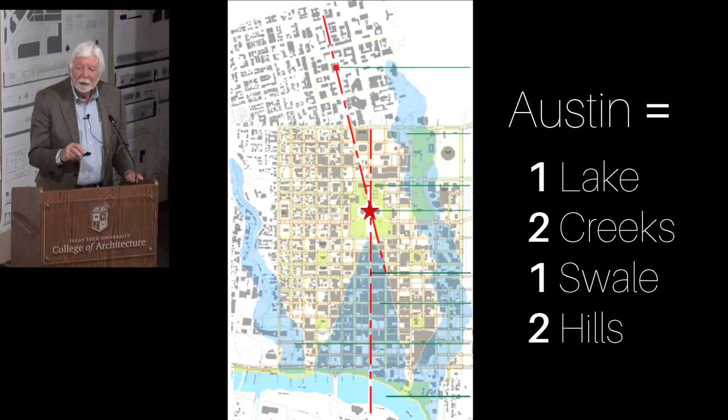Picking up where Charles Waldheim left off yesterday, the DNA of Austin. A lot of you probably know something about Austin. I know a lot about it. I went there to school in 1958 and only left once. The DNA: you start with a lake, 2 creeks, 1 swale, which is Congress Avenue, and 2 hills. One's the Capitol and one is the University Tower. That's Austin. Thank you very much.

And then it maps out like this. The campus, where there are about 80,000 people a given day. The Capitol complex, where there are about 30 thousand and will be more. And downtown, where there's about 80 to 100 thousand, maybe more, and a lot of people live there now.

This is Austin in 1997. This is Austin in 2012. That was 4 years ago. At any given time, there's about 10 cranes going in Austin, sometimes more than that. So it's a rapidly growing city. I read the other day, for many years I've been reading that it's the fastest growing city in the country, but I don't know whether that's okay or not, but it is.

The geography of opportunity, I'm real interested in this aspect of Austin. That diagram there is a diagram of the corridors, some of the corridors, and some of what we call black holes: university land, state land, military, TxDOT land that just sold last year for a major mixed-use development next to this freeway, a large state area north of campus. This is about 70, 80 acres, maybe more than that.

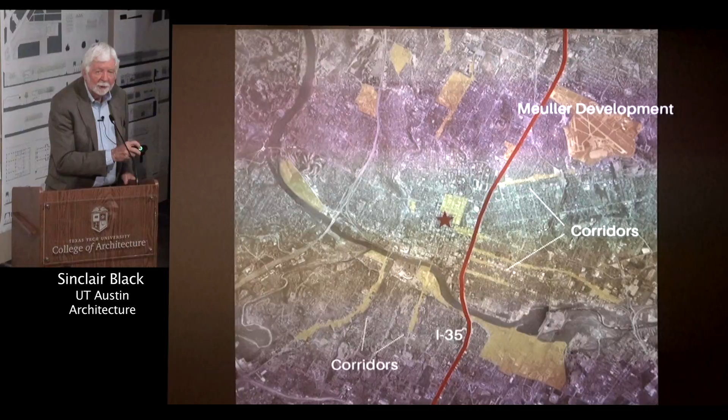This is I-35 corridor, that red mark through the city. That is, you'll see at the end, we're really working hard to get rid of it. That's the state. When I say the word black hole of all, that's what I'm talking about, is those terrible buildings, 13.5 acres of parking, of land area. There's really more parking than that, and it's only about 70% occupied by state officials, state people.

So for years we've been doing projects like this with students. This is a student project where this whole southwest quadrant here has been the subject of great interest for a long time. This was done before about $1 billion worth of development, all of which is nearing completion. The library at the corner of downtown, Seaholm power plant, which is back over there, the green water treatment plant. We'll get to see part of those.

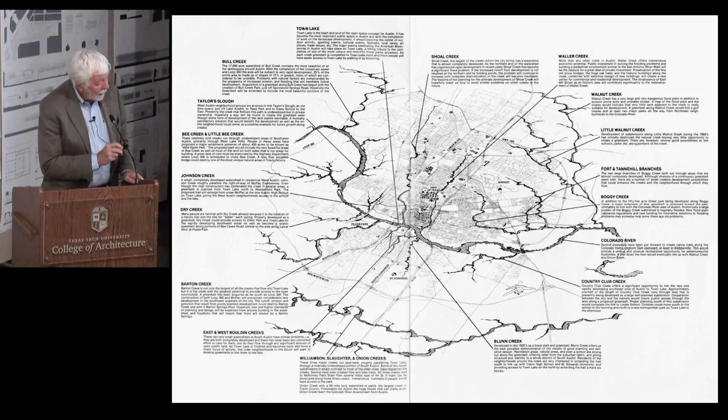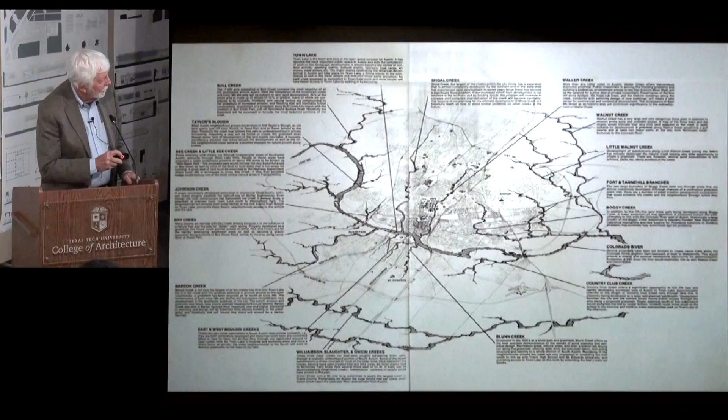It's kind of been called the foundation document for the parks and linear spaces of Austin. Waller Creek is being redeveloped now from the lake up close to the university. Shoal Creek is pretty much a trail most of its way already. Zilker Park is there, and that South Austin neighborhood has a beautiful little creek.

240 miles of creek edge, and that's a 5-minute walking distance from that. These maps were done in about '74 or '75, and it became the bicentennial gift to the nation. After that, there was about $20 million spent over the years on various parks and trails on some of these creeks.

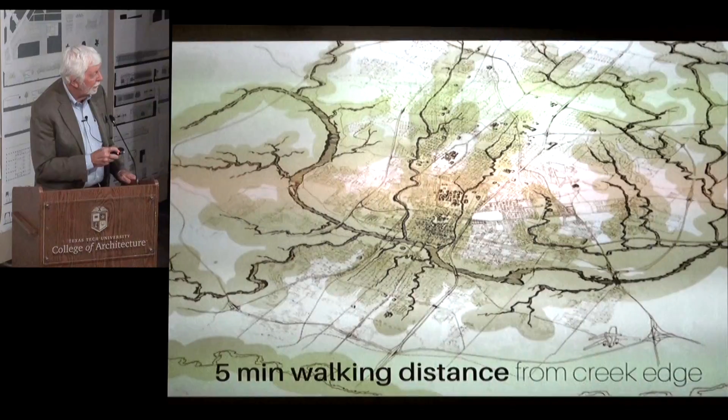So Plaza Saltillo was a competition among developers. We worked for Ken Hughes, who developed Mockingbird Station. Unfortunately, Ken passed away later, and we didn't get the project. But you can see it's 11 acres right next to downtown.

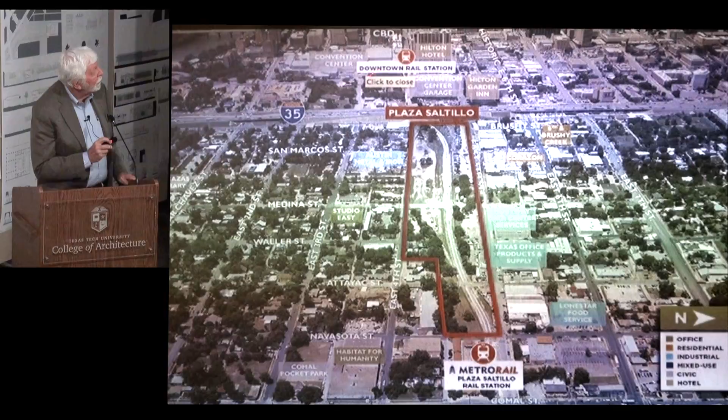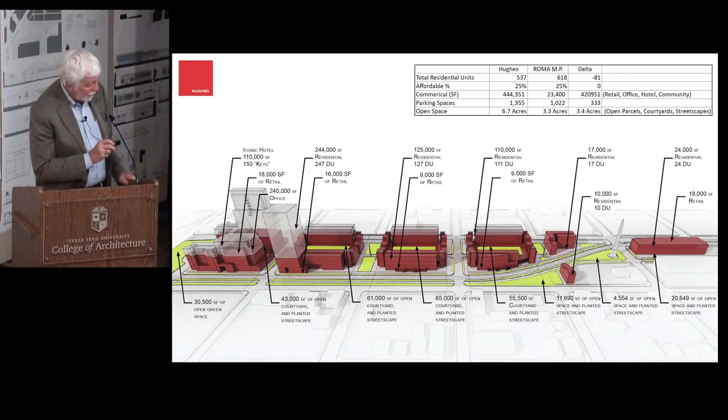That's just a diagram of it and a tally of mixed-use buildings, and that's a little pictorial diagram. Next to downtown, we proposed a major hotel, office building, and point condo, and then those other buildings behind, and the existing rail goes there now.

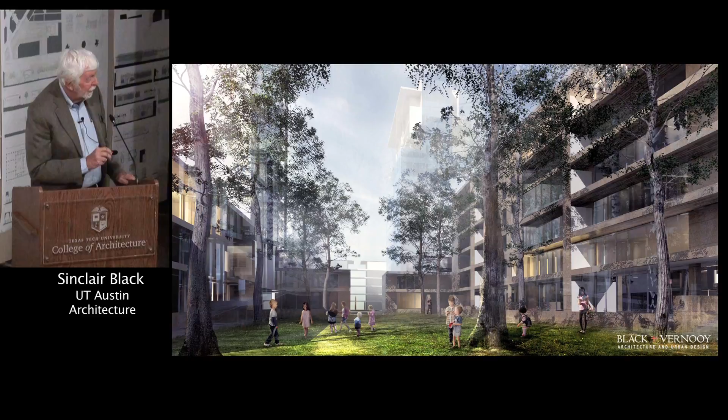So we developed this building type. What you're looking at there, you're on about the second or third floor, a private, semi-private courtyard for the residents. Retail on the street edge, parking in between, sandwiched in there. It varied from one level of parking to three, depending on the density allowed, which was a function of how close to downtown it was.

Green Water Treatment Plant was about a 7-acre area that was defined by—

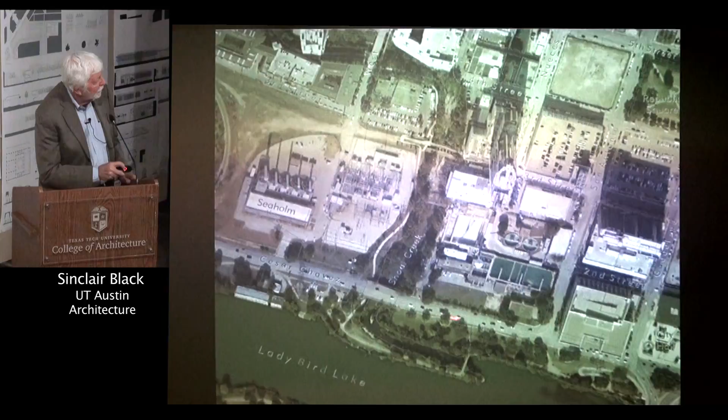That's the Green Water Treatment Plant there, which is now almost built out, not quite. That's what it looked like at the time of that competition. That was just an early diagram of what could happen there. Some very rough sketches of what that 2nd Street could wind up as at the creek, with trails on the creek.

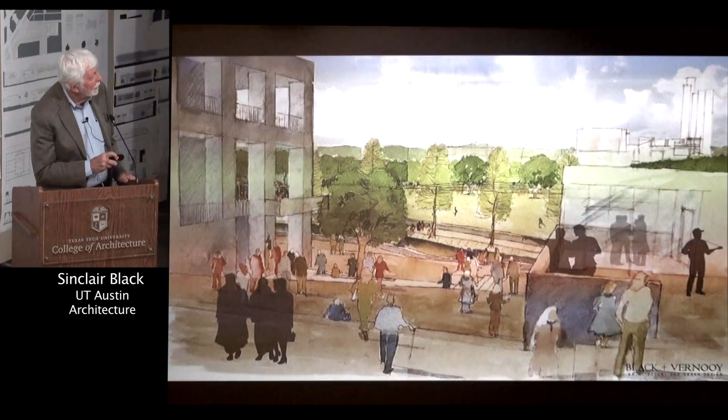And then that is the site for our new public library by Lady Bird Lake, which is almost finished. That's the Seaholm power plant in the background, which was abandoned in the '70s.

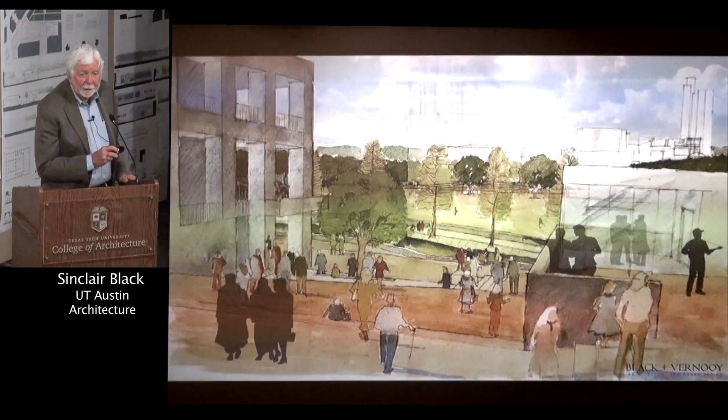That was, you see it here, and that's a segue to Seaholm, located at the corner of downtown, basically on Shoal Creek and on Town Lake. This is the intake structure. Water was shipped up here to cool the generators and then dumped back in here. This peninsula is man-made so that the hot water went that way and the cool water came this way.

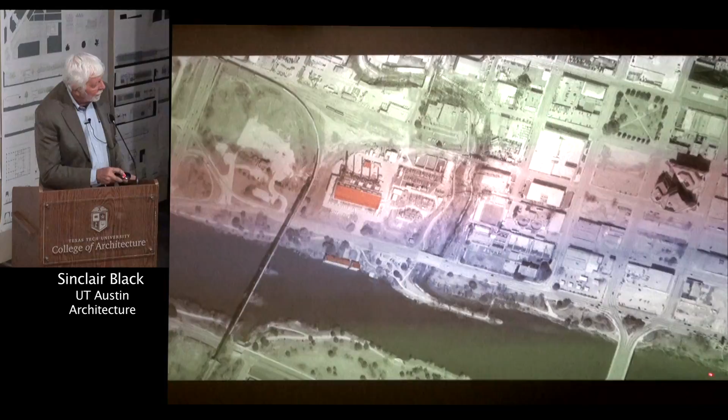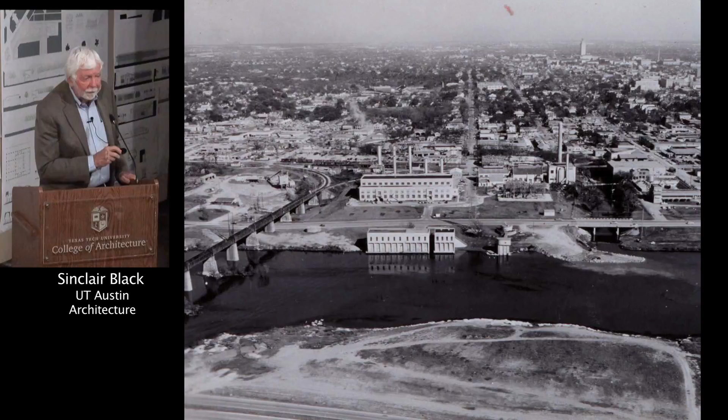That was it at about 1958 or '60 or something like that. It was the last power plant in the U.S. built as a building.

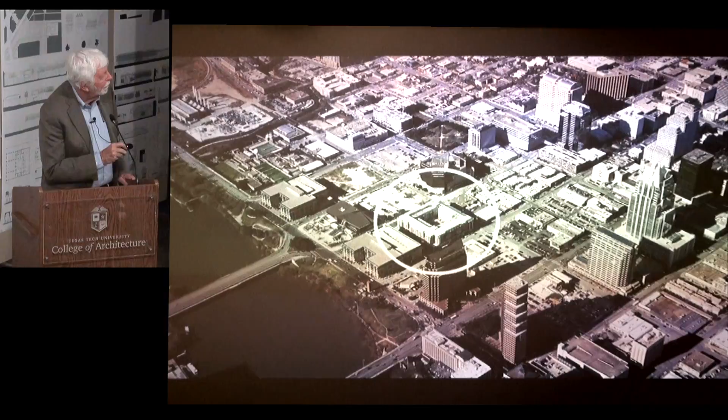We designed this—we were the design architects. Page was the architect of record. And that was a real early sketch that I did, oh gosh, now 15 years ago or more.

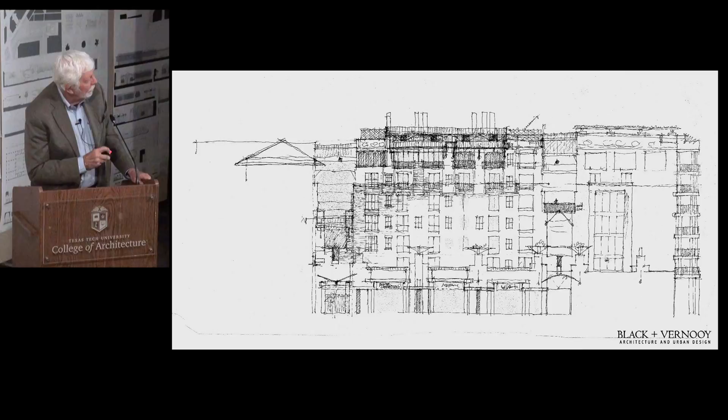And then, that's what it turned out like. It's 230 units on 1.74 acres, or 130 units per acre, which is quite dense—it's almost the limit. Push it beyond that, it's pretty difficult.

That's the east facade, which I think is my favorite. It's a very simple building based on early 20th century buildings in New York and Chicago, where all you have to do is follow the code, provide access and egress. 60% of the units face out, 40% face in, and you've got—whoa, what happened there?

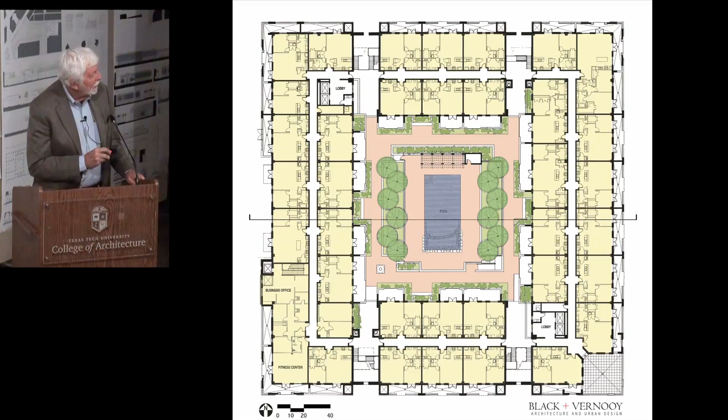You've got a 160-foot square courtyard in the middle. 16 full-grown trees are in there now.

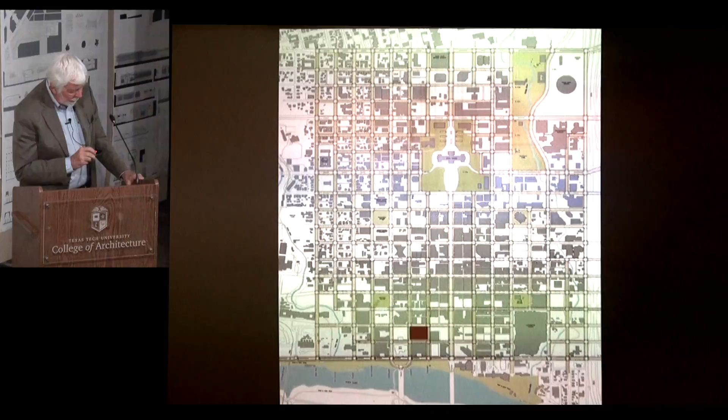And the south edge of it became part of the Great Streets program. Great Streets master plan we did, there's that site, and all the way across here to Seaholm. All of these things are packed together.

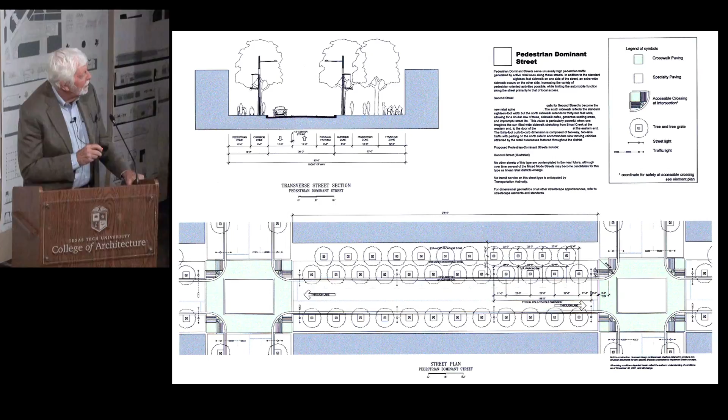This is a typical, we did 9 prototype streets. This was a unique prototype. In other words, it wasn't a prototype, it was a unique street. It's 2nd Street, and it's unique because it's the retail

street now for Austin. We searched everywhere to find a photograph of 2nd Street. For a long time, we couldn't find one. And then I found one in my own slide collection. Apparently, I'm the only person ever who was dumb enough to photograph such an ugly street.

Now, coming down toward micro, from macro, how's my time?

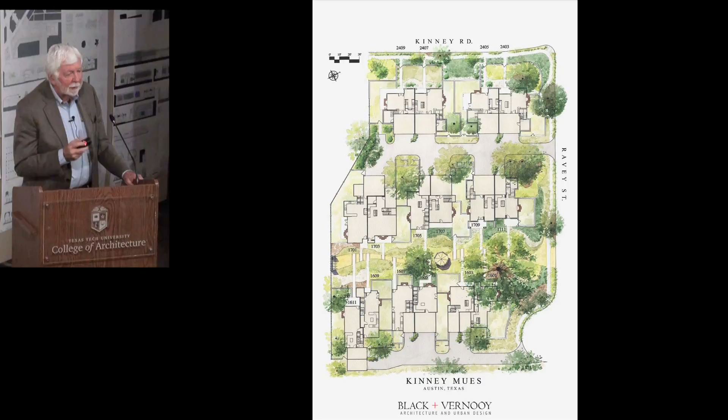This is an infill project. It was a single-family house on an acre plus a little. So we got 8 buildings, 16 units, in 8 duplexes, and no garages facing out to streets, which is sort of a pathological commitment on my part, not to have garages face the street.

This was a fun little project called Tiny Victories. That's the name of the competition held by the local AIA. Tiny Victories had a program like this: 200 square feet, no plumbing, no kitchen, electrical, maybe a fan, well ventilated, well protected, 200 square feet. Ours was 11 by 18.

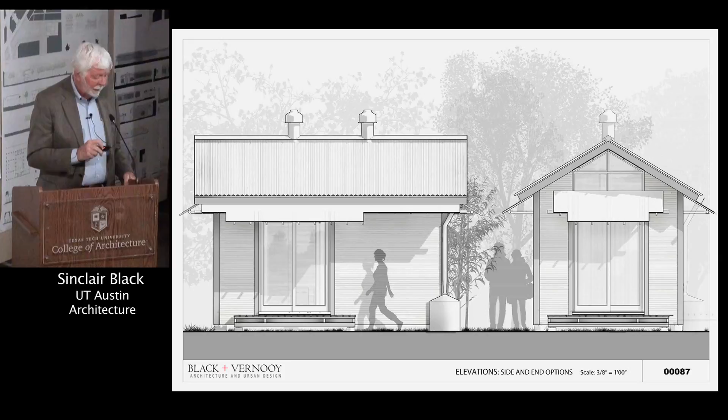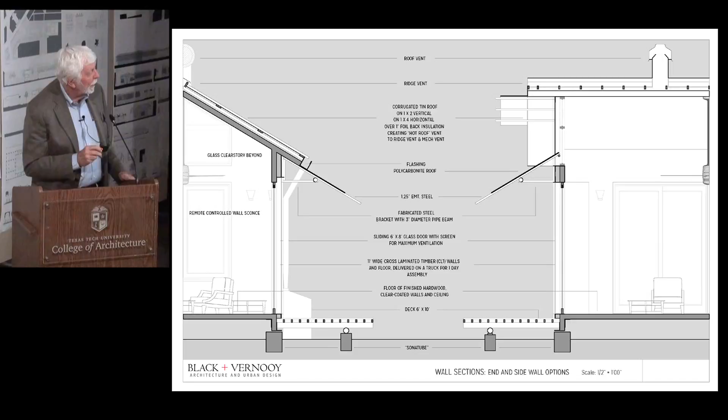So in that competition, they had a bunch of entries and they chose 4, and they're building out a lot of them. Will eventually be a community of 140 living units for the chronically homeless. These are people who probably will never go back inside of a real house. And of course, everybody donated their time. McCoy's Lumber donated some of the material, sold the rest at cost. And that was our competition entry.

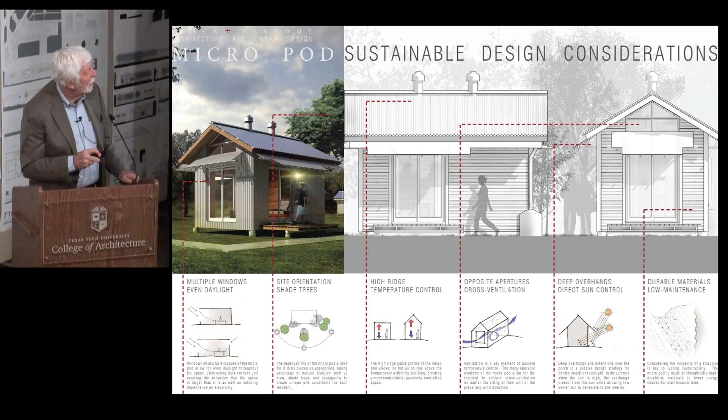That was our energy considerations outlined. And that was the first one built. 2 more are scheduled to be built, and maybe more after that. But I could live there. I may someday.

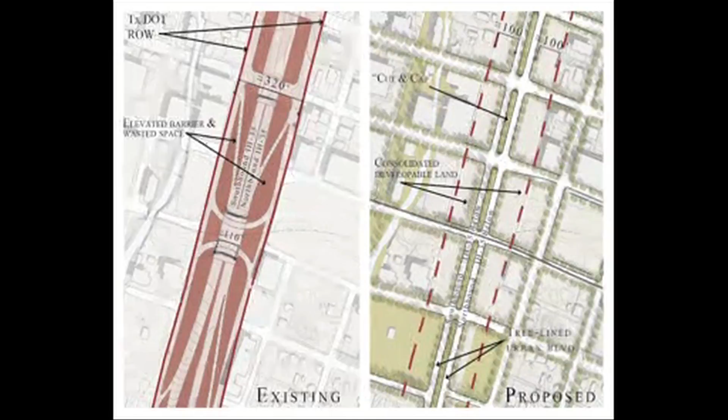What if we could reclaim the I-35 corridor through downtown Austin, reconnecting the street grid and restoring East Avenue in the process? Imagine the main lanes of the interstate below ground, covered at ground level with a continuous cap, replacing the former frontage roads with a civilized urban boulevard appropriate for all users, creating more driving options for city traffic, plus opening the way for new parkland and high-quality development.

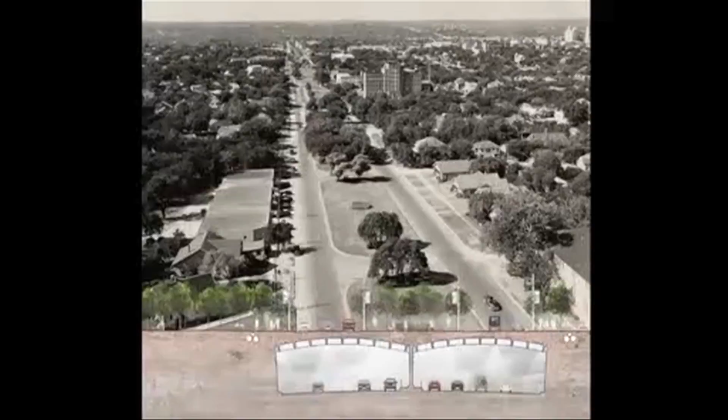Our purpose is to reconnect Austin back to the future. This plan improves regional mobility by increasing capacity with more lanes, reduces congestion by relocating local traffic, and adds 60% more east-west connections, increasing accessibility into downtown.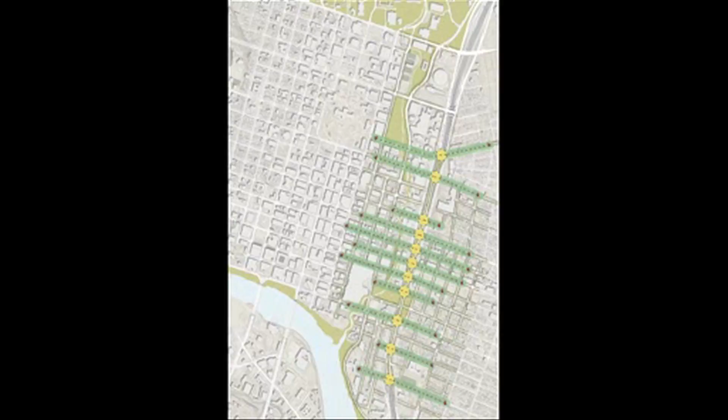We can reconnect our city with great streets, separating high-speed freeway traffic from our city traffic. We can create a pedestrian, bicycle, and transit-friendly environment, provide a higher quality of life, and facilitate the social and economic exchange that cities are founded upon.

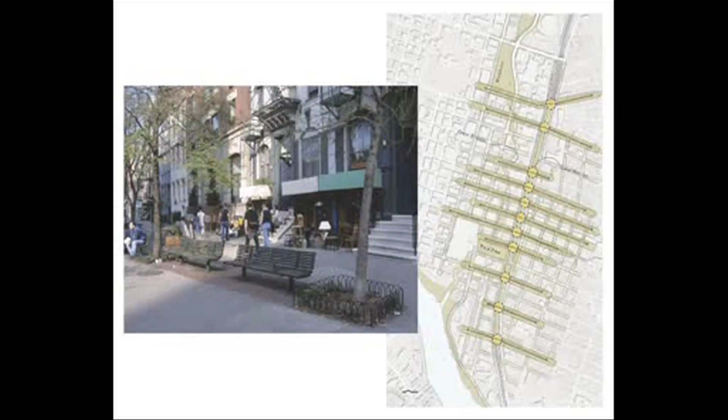2nd Street, pictured here, is the best success story to date of Austin's Great Streets program, a truly radical transformation and huge benefit, both economically and socially.

Looking east on 5th Street from downtown, the barrier of the highway is obvious. But consider this: with the highway hidden below ground, this intersection is once again a viable part of our city. Voila! Human-scale development in an urban environment.

Let's see it again. Remove the barrier. Connect the grid. Re-engage with your city. A place for people, sidewalks with shade, a vibrant community.

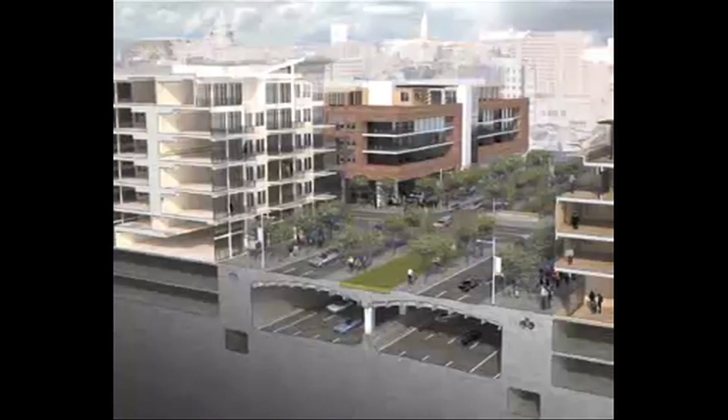We can solve our traffic problems and address the negative impacts of I-35 with a technology called cut and cap. The freeway main lanes are in the cut, which is covered with a cap that blocks freeway noise, and a ventilation system removes vehicle pollutants from the air, making I-35 a better neighbor for everyone.

Like Austin, cities across the country are struggling with aging, congested highways that divide their cities. In Dallas, there is a new cap over the Woodall Rodgers Freeway. Clyde Warren Park opened in October of 2012. It is already a huge success.

Boston reconnected downtown to its own waterfront, as well as the historic North End neighborhood, improving traffic flow, saving commuter time, and creating new parkland. Other cities have capped over rail lines and parking to create usable urban space.

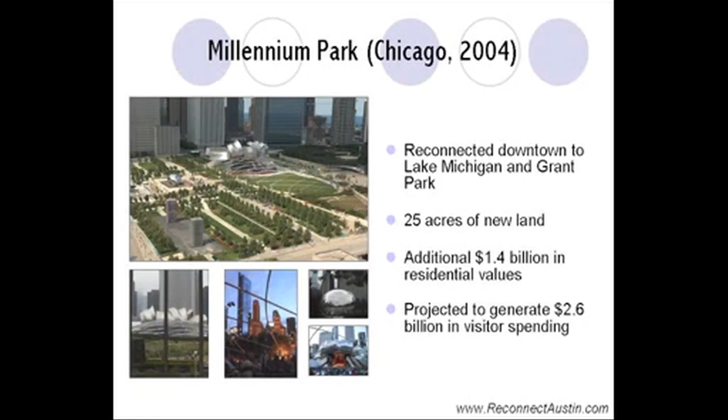New York's subway system is a cut and cap, even along Park Avenue. Millennium Park in downtown Chicago is a cap over rail lines. And Houston's Discovery Green is a downtown park over underground parking.

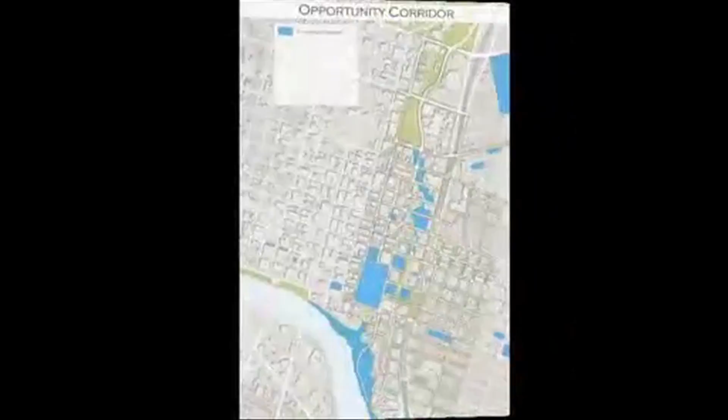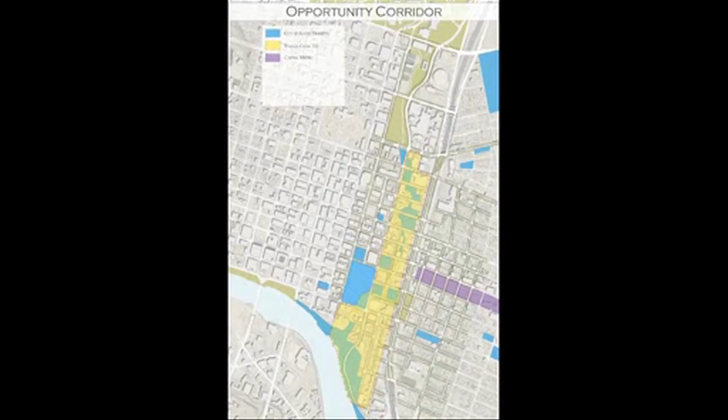Massive taxpayer dollars are already being invested in projects along I-35, including the Waller Creek Tunnel and its associated tax increment financing zone, Plaza Saltillo and the land owned by Capital Metro, the existing and growing Medical and Innovation District, the proposed University of Texas Medical School and Teaching Hospital, and of course the University of Texas campus.

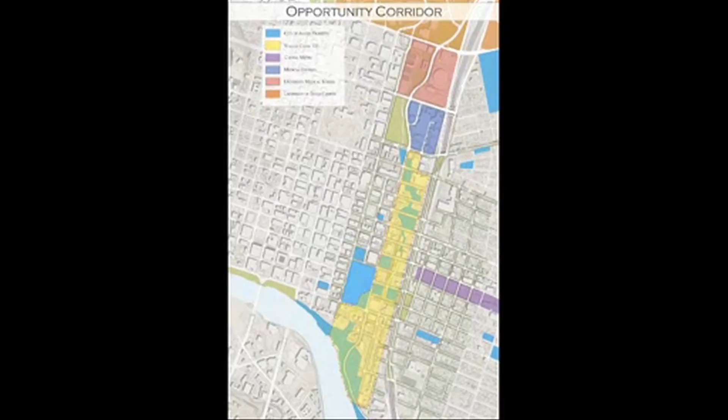Ours is a unique, once-in-a-lifetime opportunity. The time to act on this vision is now. At risk is our quality of life and economic competitiveness as a city.

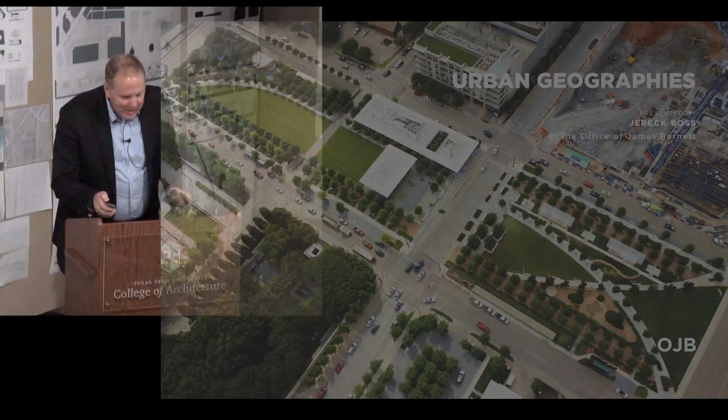A little bit about our office before we get into things. Urban geography. So I am, I guess in the group, I have never been an educator. I have been a projects guy from the time I graduated, and work with the office of James Burnett. Our focus is on built work. We do very little master planning. If we do master planning, it's usually with the goal in mind that we will be building something as soon as we complete that plan.

So today what we would like to present are two different projects. I guess in the context of a city, I would think they're both micro. One is a 5-acre park in Dallas, so maybe that's the micro.

The other is a 180-acre redevelopment in downtown Oklahoma City, where we reconstructed 9 miles of streetscapes on 17 street alignments. So 180 acres, maybe in the context of a sprawling city like Oklahoma City, is micro, but we think it's maybe a macro project.

But a little bit about our firm. We were honored last year as the ASLA Firm of the Year, and very excited to follow that up this year. In just a couple of weeks in New Orleans, Jim Burnett will be receiving the ASLA Design Medal. So very excited about that.

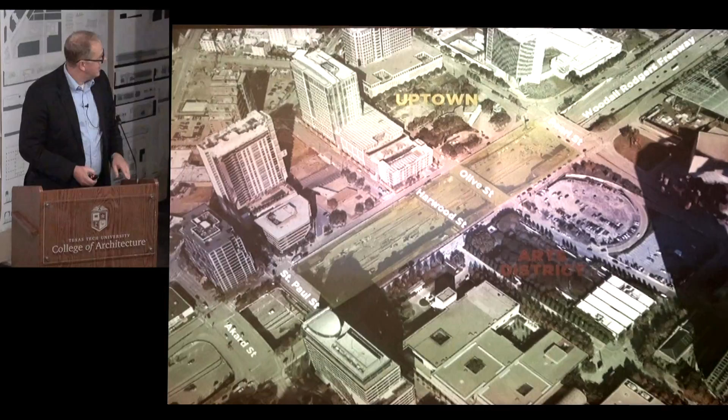This is the location of the park. This is where Museum Tower is, this is the Nasher Sculpture Center, Dallas Museum of Art, and now all of these projects are being filled in with new towers from award-winning architects from around the world.

A little bit about the park. It began as an idea back in 2004. The Park Foundation was formed with John Zogg from Crescent, Jody Grant from Texas Bank, and Linda Owen, who was with the Real Estate Council in Dallas. As they formed that foundation, they put $1 million together to do a study. With that $1 million, we did some preliminary engineering, really came up with a cohesive idea, put some pricing together, and came up with this big, crazy number for this idea to see if it would work.

In 2006, the city raised $20 million, and agreements started moving forward. In 2006 and 2007, there was a worldwide design competition - they went out to 50 firms. We were shortlisted with 4 and won the project, and we were off to the races.

One of the conversations that David and I had in the car this morning - as I was in design school and thinking about my career, I was always most interested in design. The thing I have learned as I have practiced over the years, there are 2 skill sets that have become very important. One is really understanding economics and business, and the other is understanding marketing. So as we work on big projects, we're always trying to expand those projects, think outside of the limit line of work, and really understand how the financial components work.

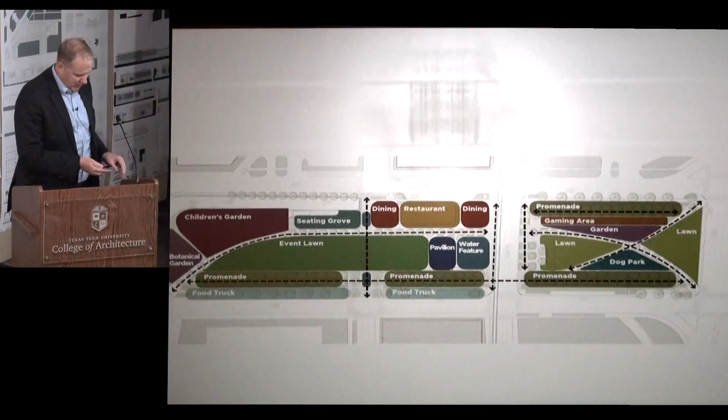So the program: botanical garden, children's garden, a seating grove that acts as a reading room. We have outdoor dining, Savor restaurant, the southwest deck, a big water feature plaza. The pavilion and restaurant were both designed by Tom Phifer, who we had worked with on the Brochstein Pavilion at Rice University. The main event lawn, a big promenade and a lawn, the dog park, and then a gaming area, and then another lawn. Right now, the children's garden will expand to this area, and there's a new water feature and art installation proposed for the other end of the garden.

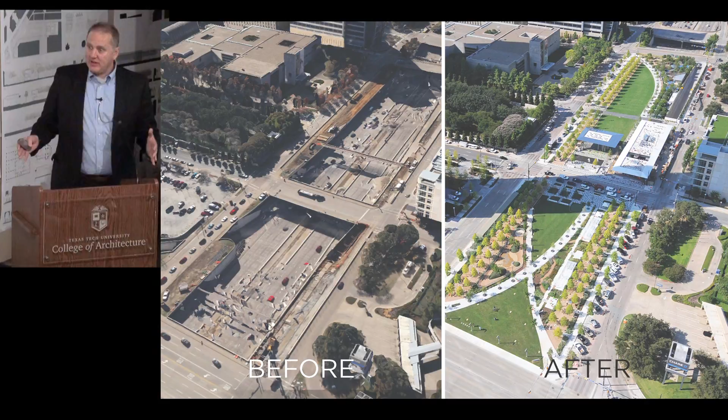This is the park before—an active 8-lane freeway. One of the requirements and challenges of this project was you cannot close the freeway; we have too many vehicles coming through this part of the city. So there was a lot of coordination, a lot of finagling with TxDOT to install at off hours, 10 p.m. to 5 a.m., really working those schedules with various events downtown to install 300 plus box beams.

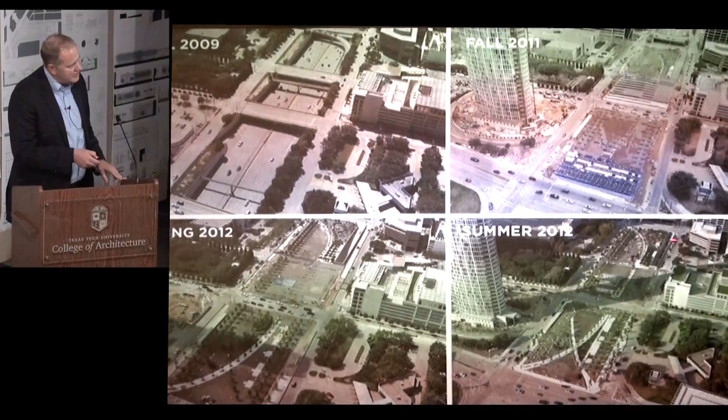In these images, you can start to see this park coming together: the initial condition, some of these box beams working their way across, then beginning to fill up the foam and the soil systems, putting all of this together, beginning the planting, and then finishing up with the hardscape. Pulling this together to have the completed project.

Another thing that changed—these are feeder roads, and if you've ever been on a feeder road in Texas, it's about maybe going faster than freeway speeds, and even coming out of a restaurant on a feeder road or trying to get off, you're taking your life in your own hands. So one of the big ideas was, what if we had parking along the side of the park and on-street parking on this feeder road? TxDOT said, absolutely not.

We worked with the city of Dallas. We said, we've got to think outside the box—who's your boss, who can really help us make this decision, how can we maybe change some of this thinking? So we have on-street parking now on the feeder road. These lanes have narrowed, traffic speeds have really slowed down. As people come from the central business district or the arts district and cross these TxDOT facilities, the traffic is much slower, much easier to work with.

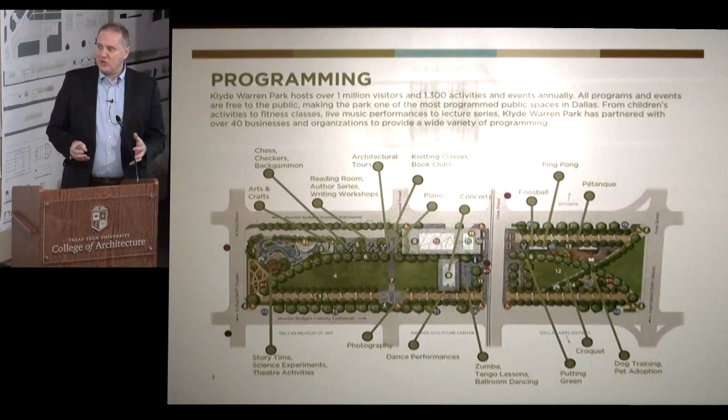And they're always monitoring who's attending, how successful is it, and do we need to be making changes to keep this relevant to what people are really looking for.

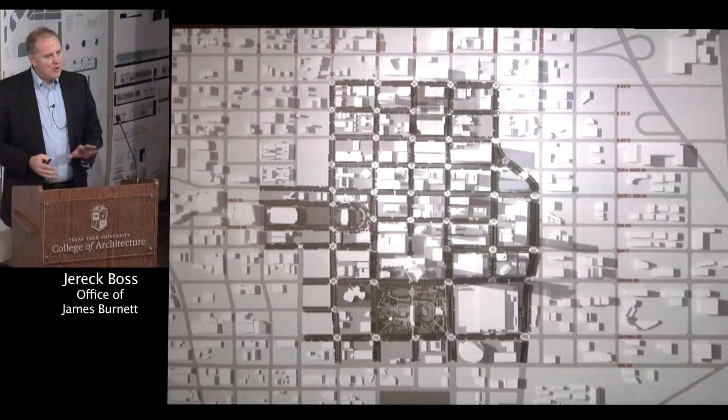So Devon put together a TIF. They had a $750 million, $800 million project that they were working on. They decided to front-end fund the project, so you get all that TIF money for 20 years, you get it on year one, and you can spend it and do all of those things.

They put a list of projects together, and then they encompass this 180 acres, and they say, we want to give this back to the city, and we don't want anyone to think that we've spent the money on ourselves. So Devon's project is exempt from the TIF, so they don't spend any of this money on their own development.

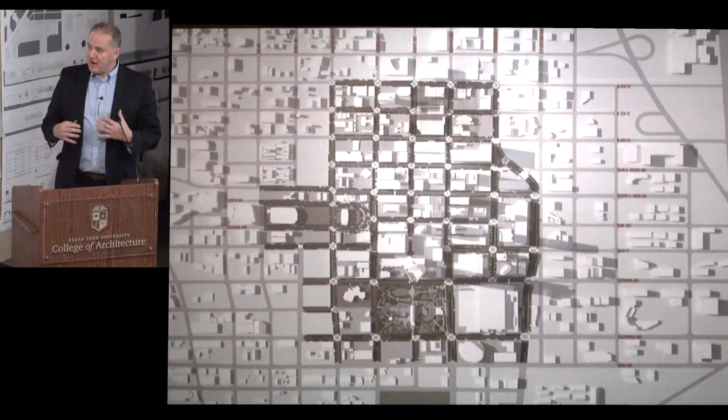We kick off the project and decide we're going to survey 180 acres. We interview civil engineering firms and ask, can you survey the city in a month? They say it can't be done. How much can you give us in a month? Can you put all your crews on the project? So in 45 days, we had surveyed all of downtown Oklahoma City, and in 60 days, we had the final survey for the project.

We kicked off and hosted our first meeting in July. We had a design team coordination meeting. We set up a steering committee. By March of the following year, we issued a full aesthetics plan that totally rethought the streetscape master plan for a contemporary, forward-thinking city. Then by August of that year, we issued bid package 1. Really coming together with amazing teams.

This shows one of our steering committee meetings. We met with the city manager, assistant city manager, the director of public works, the parks director, and COTPA, which is their parking authority. We had all of the key decision makers blocked out for a full day. They met in the morning on the parks, and we met in the afternoon on the streetscape so that we could make decisions and move forward as a team.

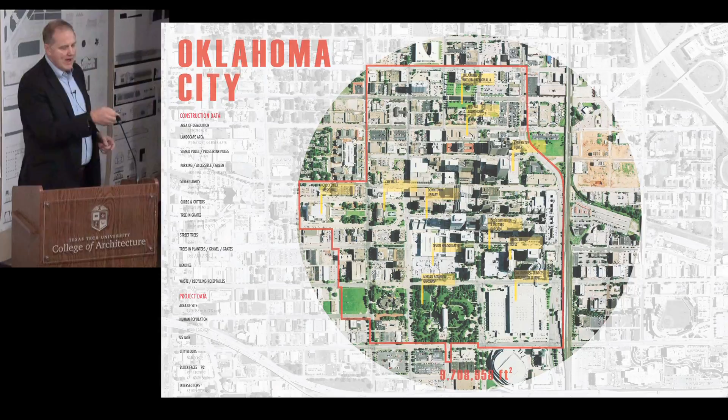And then how can we work through accessibility? We want pedestrians, accessibility, bicycles, and vehicles to all have one system working together. And then how can we develop new sustainable standards? We looked at all the metrics, we walked, we took thousands of photos documenting every condition, every drive.

We put a list of projects together with the Devon Implementation Committee that included the Myriad Botanical Gardens, the streetscape, improvements at the arena where the Thunder play, Bicentennial Park, the Arts Council, and the city lawn, and then began aggregating the money. The Devon TIF contributed a big chunk of that money, and then general obligation bonds contributed another big piece, and then $10 million came from the downtown utility money available every year. So every year they have between $10 and $11 million that they can spend on infrastructure downtown. And then just from the general fund, they decided to kick in $2 million every year.

And then we were off. What were the roles of the project management team? The site analysis, leading the steering committee, looking at transportation plans, reading those plans, understanding them, really pushing ideas, figuring out what those deliverables would be, re-envisioning a new city.

We drew all new details for their public works - 300 new details that we drew, totally rethought how they would maintain the downtown. How will they pay for the maintenance? So we worked with their bid to figure out a pricing schedule and what would happen on a daily, weekly, monthly, and annual basis for all of these improvements to keep them in place, keep them maintained.

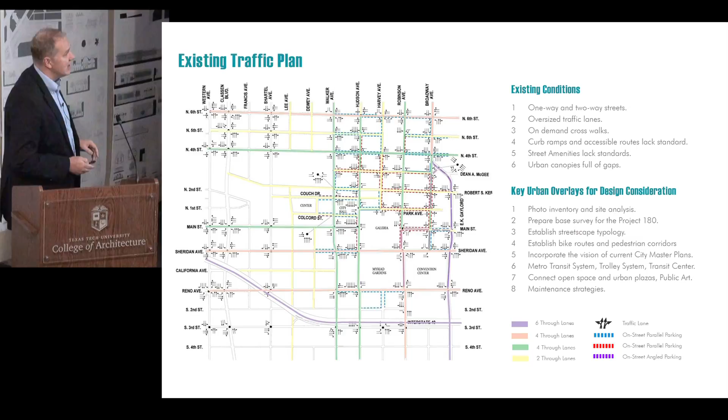And then we went through the planning. What's the existing traffic plan? Where are the roads too wide, too big, too many lanes? Some of the streets had 4 lanes that were 14 feet wide. Cars were driving as much as 50, 55 miles an hour through a little downtown. So we've got to fix these things. There were free right turns at all the intersections, huge pedestrian conflict.

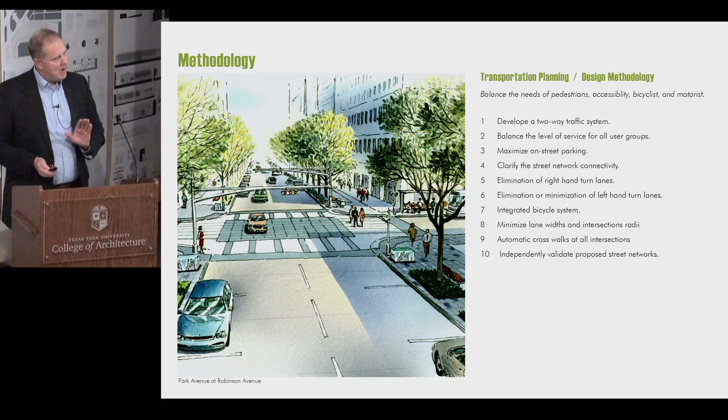And then we put together a series of methodologies. Let's bring the city back to a 2-way system. Let's right-size all the lanes. Let's maximize parking. Let's make bike facilities a big component for this project, and drew a totally new traffic plan. And the local engineer said the traffic will collapse. So we had to go out of state and find a traffic engineer that would send us a letter saying, I think this will work.

And we said, trust us. We looked at smaller radiuses on the corner, and one of our partners in Public Works, her husband worked for the fire department, so we were proposing 15-foot radiuses from the 30-foot radiuses they had at the corners, and they said, you can't do it.

So he borrowed a fire truck, and we painted a 15-foot radius in the pavement, and it worked. We called San Francisco, New York, Dallas, Portland, and Salt Lake City, and said, what are you guys doing to change things? We talked to their planning and public works departments so we could prove to our team what other engineers and contemporaries were trying to do in other cities to make their cities great.

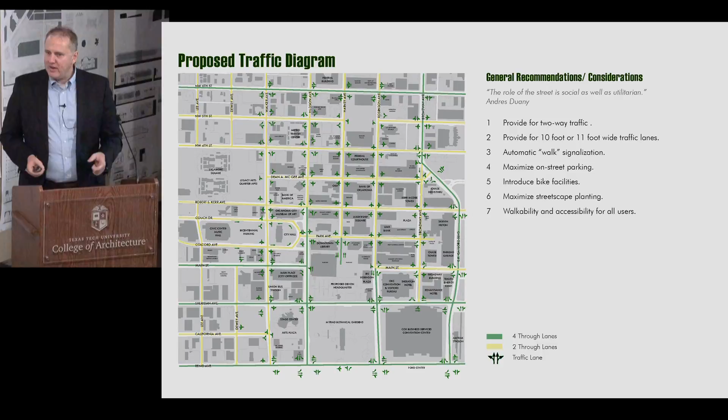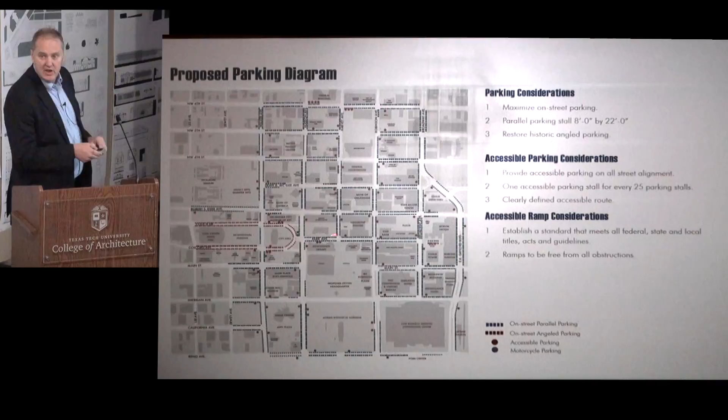And then we started to vision with ideas. We looked at the parking. We restored some of the historic conditions around the Civic Center and the City Hall building. And then we started to solve the accessibility. We built a ton of models because they gave the scale and the context.

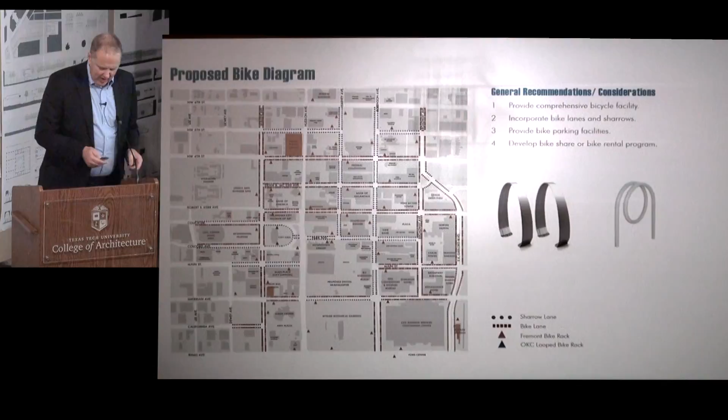We looked at a bike facility program, making bikes part of each of the key streets downtown, and looked at bike rack locations, looked at bike sharing, and everybody said no one will ride a bike downtown. So the city manager said, look, I'll put on some biking shorts and ride a bike, you can put it on the city channel. And he showed people how you could ride a bike downtown, and they played it again and again.

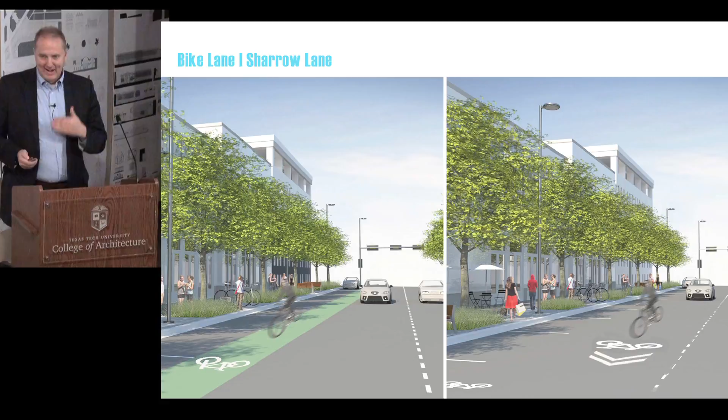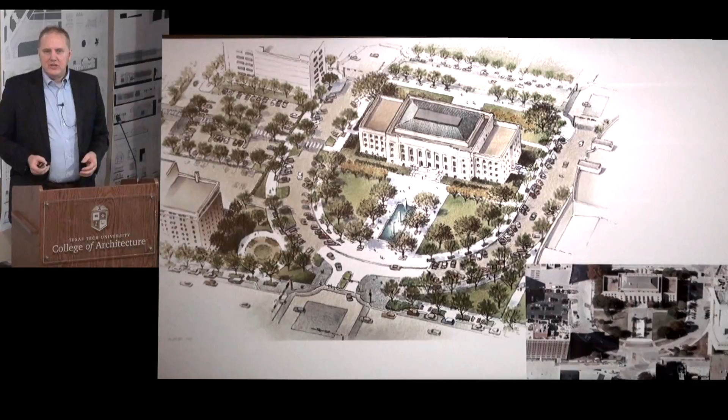Walkability and open space was important. How can we connect the plazas and the green space downtown? How can we bring back some of the historic character of the old city hall and have a contemporary feel to that of a forward-thinking city?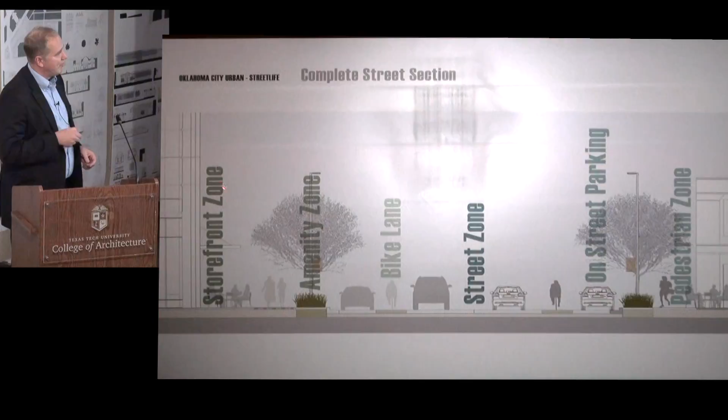And then starting to proof up all of these pieces with a clearly defined street zone of 10 and 11-foot lanes, a bike lane, on-street parking, a great amenity zone that separates pedestrians from traffic, and then storefront zones for all of this new retail and restaurants that would come in, really working the pedestrian realm so that it works and people want to walk.

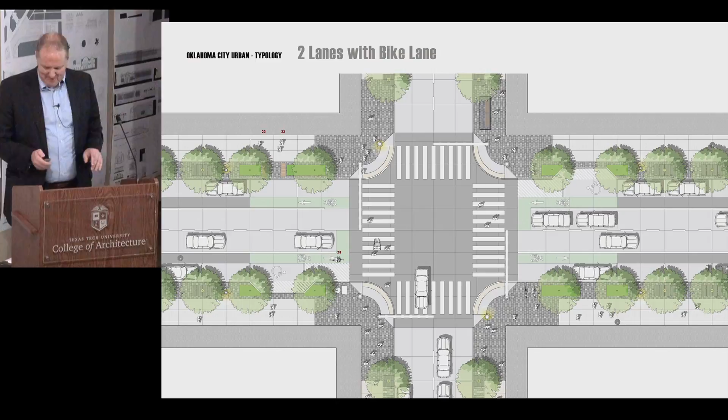And then we started to draw everything. We figured I think we can build it beautiful just as cheap as we can build it not so great. But we have to get a module. So we did all of these different studies, looking at the roads, the pedestrian realm, and the vegetation.

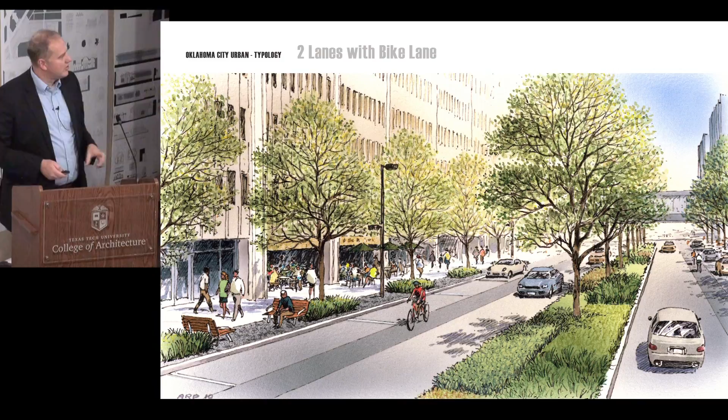This is what the road can feel like. This is what it can feel like in the model. Everybody knows where they're supposed to be - the car, the bike, the pedestrian, crossing traffic - and then getting all of these systems with the pull boxes and all of that in the right spots.

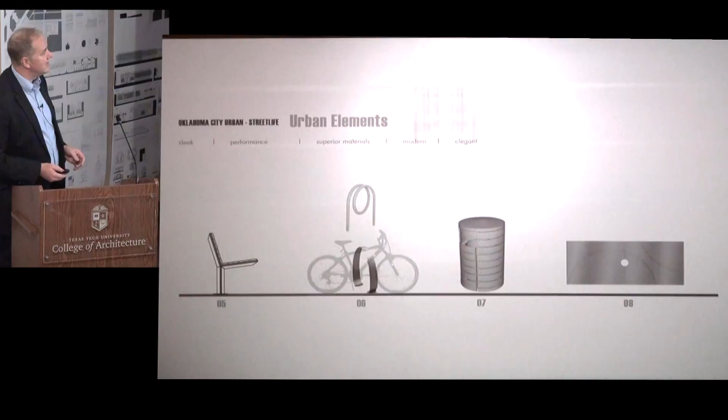And then setting a palette of materials together from signage and lighting, all new LED lighting in the city of Oklahoma City - first city in America that has all of their downtown, 3,000 LED poles. It's amazing. And then all of these urban elements and urban fixtures that make up that comfortable amenity zone.

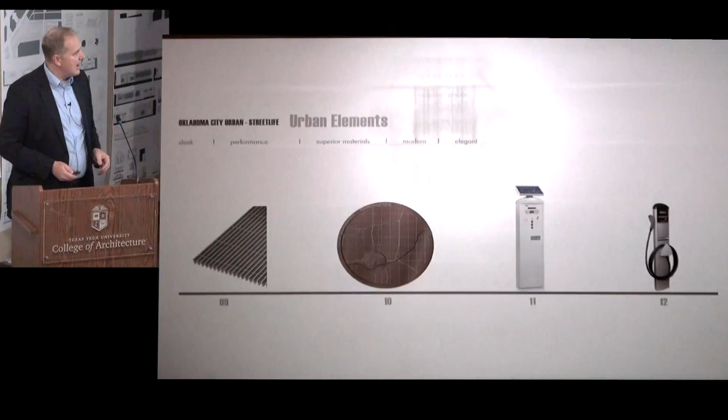And then showing them what are they going to look like. And then pushing the envelope. New parking.

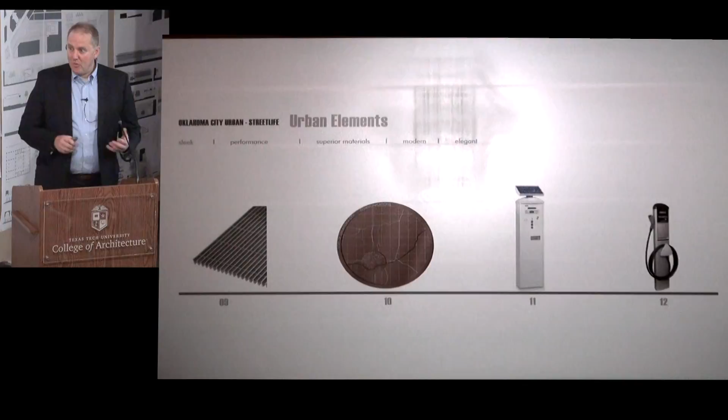Sustainable parking, green parking. They said, no, we're an oil city, we don't drive electric cars. Let's just put them in, we can get a grant. We got a grant - not only did we get a grant for electric parking, we also got bike share. We got 8 bike share locations, which was amazing.

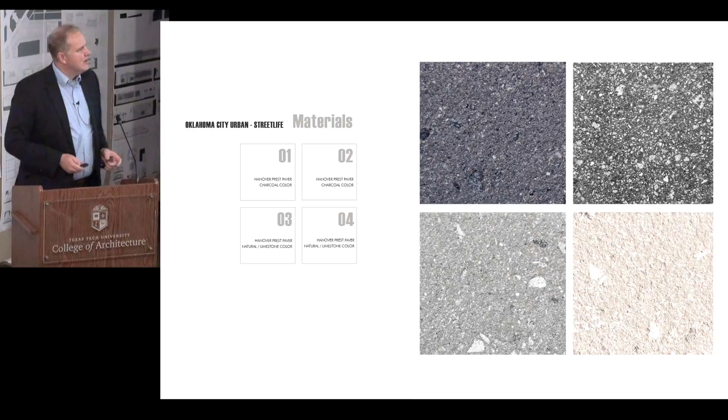So thinking differently and working together and pushing people, and then selecting local materials that'll be durable, that'll be classic, but still have a contemporary feel, and even down to what kind of a detectable warning are we going to use downtown.

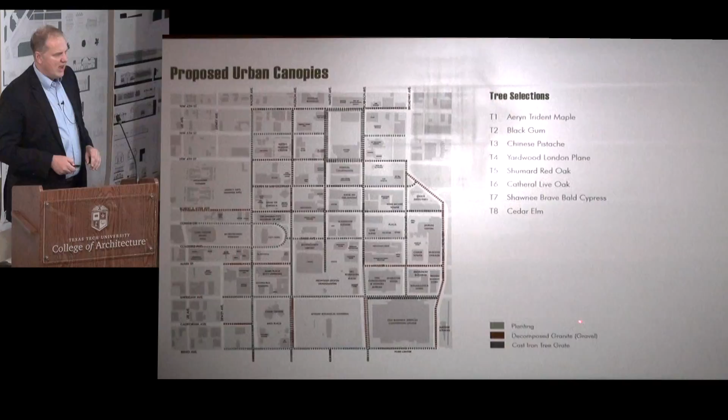And then we started working through the vegetation, working with the urban forester from the state, picking hardy trees, working with local nurseries, and then looking at all of these varieties and trees in planting, in gravel, and in grates, getting those right trees in place, and then getting all of the systems right.

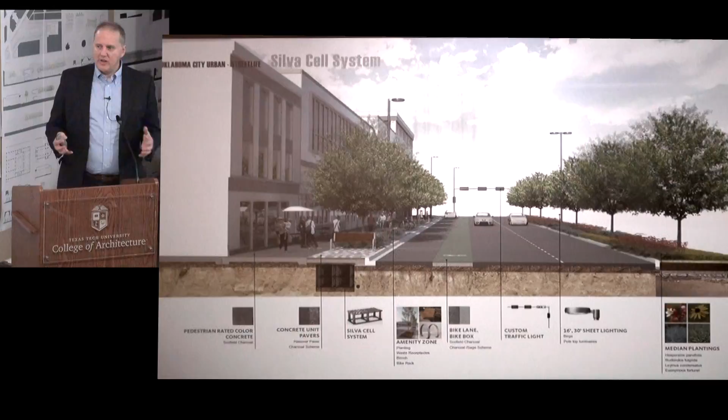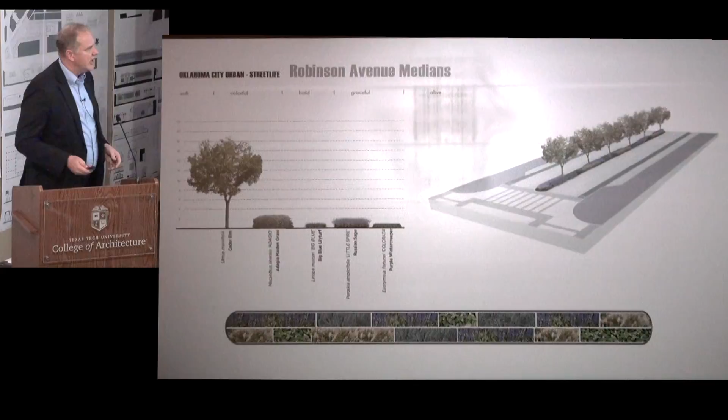So all of the trees are planted in a continuous soil trench, so that we put a $200 tree in an $800 tree pit. So we have an amazing tree that will last for years and years, showing how all these components come together, and then getting the medians just right so that these plant materials could take the wind, the rain, the hail, the ice that you get in Oklahoma City - seasonal color, texture, qualities to that.

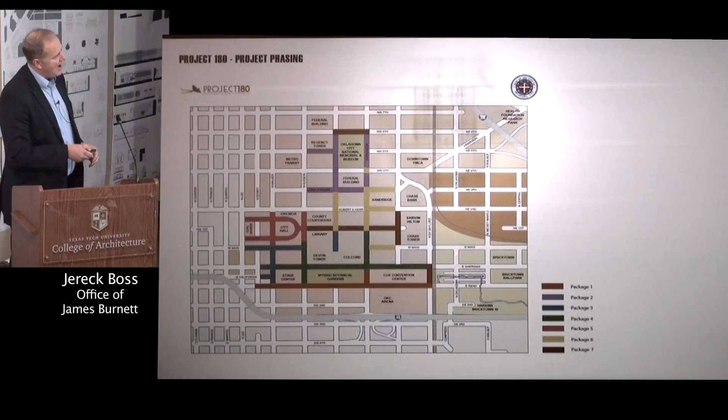And then the project update - how's it done? We started building almost a year from when we kicked off, which we thought was amazing. So bid package 1 happening in 2009, bid package 7 just completing now. So these are all of these streets that you see in color - we finished.

The really important thing in collaborating is not just collaborating with your steering committee, but collaborating with the local design team that's going to help you implement this, and then working with the people who will have boots on the ground. So Kenny with Public Works, who does construction administration, feels part of it, feels the pride that we're building this right, and understanding how all these things go together.

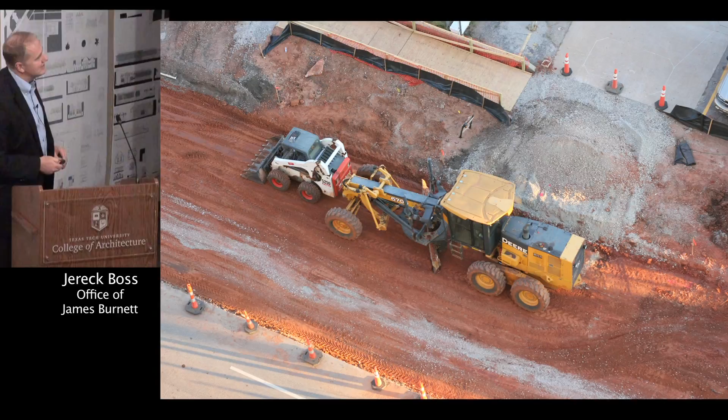And then doing mock-ups that all of the bidding contractors can see, constructing it. Again, doing another mock-up, and then building the soil trench and seeing all these systems start to come together. And then the completed project.

Outdoor cafes coming back online, bike share, women coming back downtown by themselves running, weekend activities coming back downtown, grandma bringing her grandchildren back downtown to talk about it, young couples moving downtown and deciding to stay, and then new infill happening.

And then the benefits of this, all new streets. Unofficial numbers, they've talked about $2 billion of reinvestment since Project 180 began. And then reinvestment in the old—so taking a building scheduled to be demolished, adding a new twist, bringing restaurants and people back downtown. So thank you.